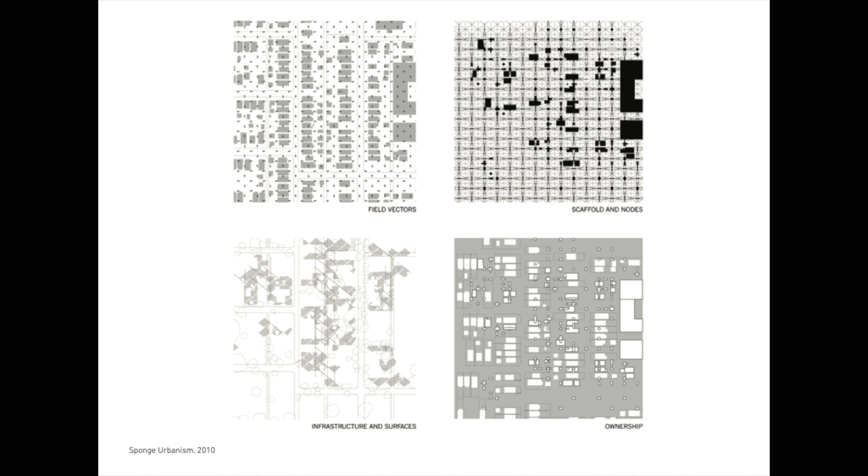So we did this by starting with a diagram, producing a series of diagrams that — I won't go into the details — but that try to switch the understanding of the space from being organized along streets and blocks to actually multi-directional fields.

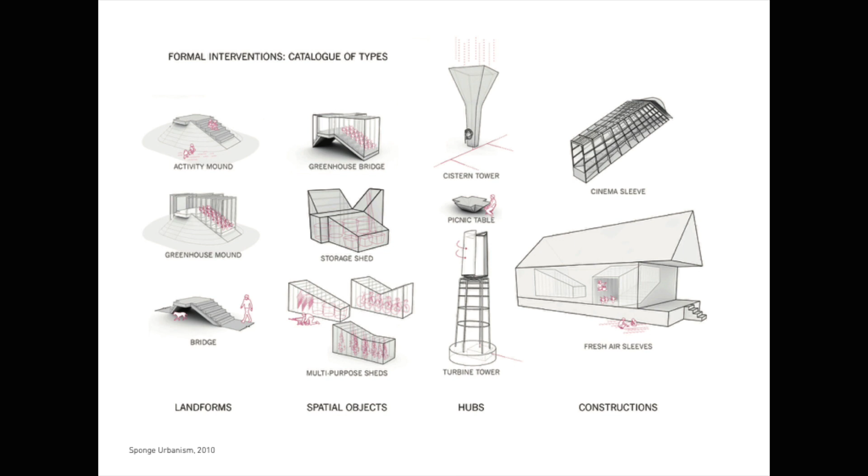If we could look at the kind of erosion of the block and of the urban fabric through the lens of this multi-directional field, we could develop a strategy where we insert really small-scale objects in what we call the minor diagram, to produce a series of infrastructures that could support the neighborhood and support the activity there.

This was developed for a publication called Architecture is All Over, published by Columbia University last year.

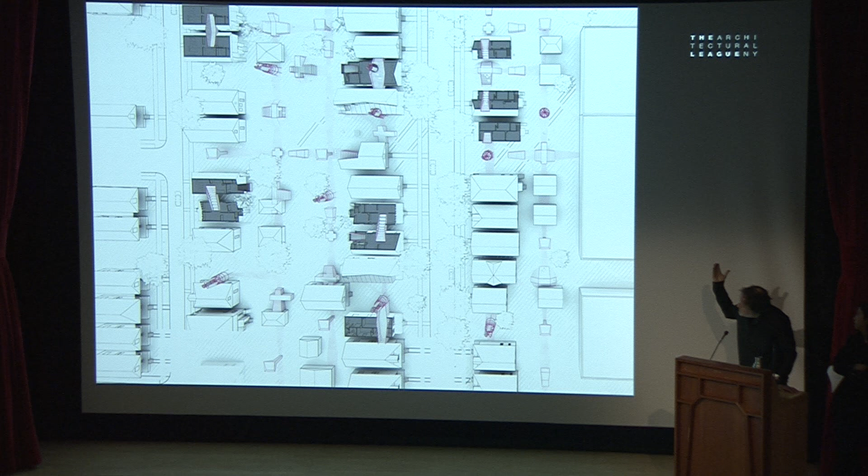In this project, you can see even the way we drew it — in this case a perspective much like the perspective from the image of the Eiffel Tower — actually cutting away the roofs and rethinking the city from the foreground and background actually collapsing. So it operates something more like what we imagined was a kind of sponge, and we called this project Sponge Urbanism.

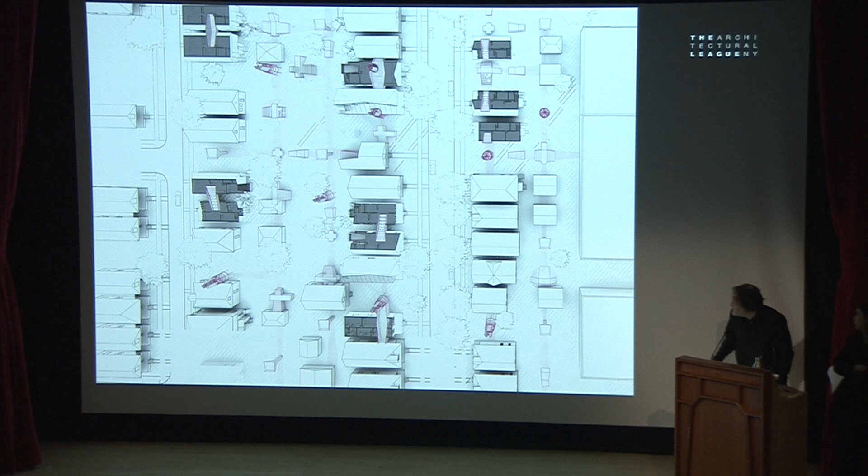This project was both an idea to demonstrate, but also we wanted to make it an idea to test a series of ideas.

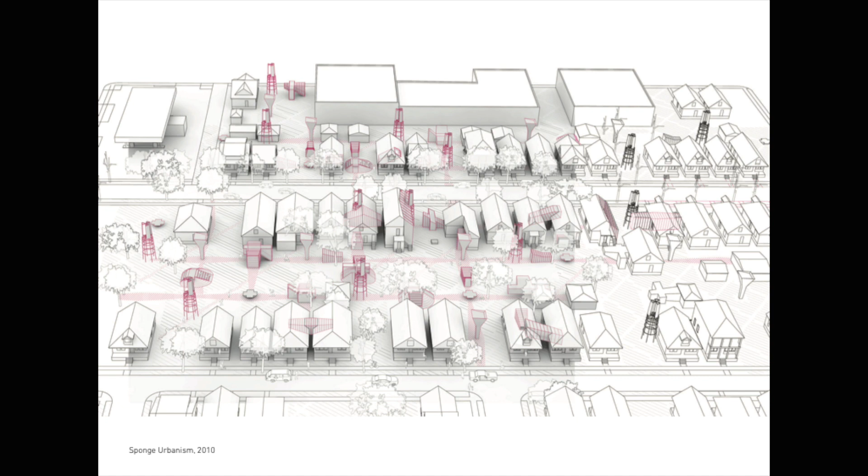We got together with a group of people at Michigan, most of whom call themselves Team now — you guys might know some of them — and we purchased this house with the group for $500.

This is the house, and the house next door actually had burned down — you can see it's fire damaged here in the image.

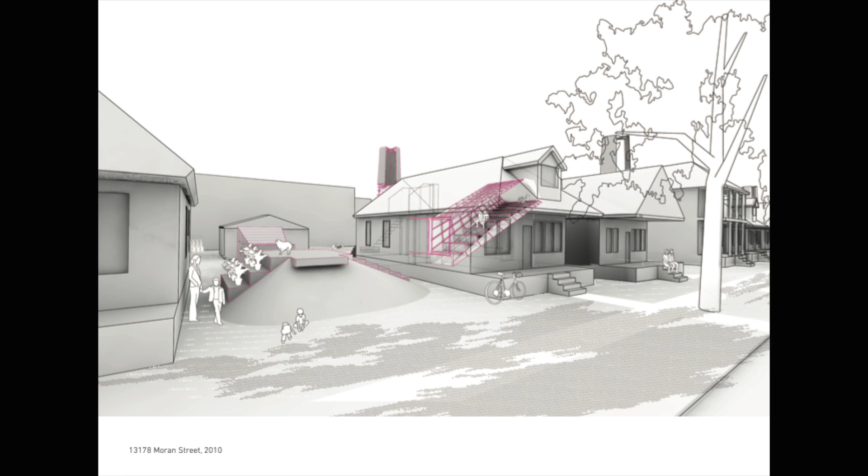Working with some local arts groups, we developed an idea. Everyone took a piece of the house, and we took this one piece in the front of the house to again look at the kind of reorientation of the house in this cross-diagonal axis. In this case, we were designing something that would be a kind of theater for projection, or maybe a theater for small readings, that could work once that fire-damaged house gets torn down — there would be this kind of park that would emerge, and also would bring light into the space.

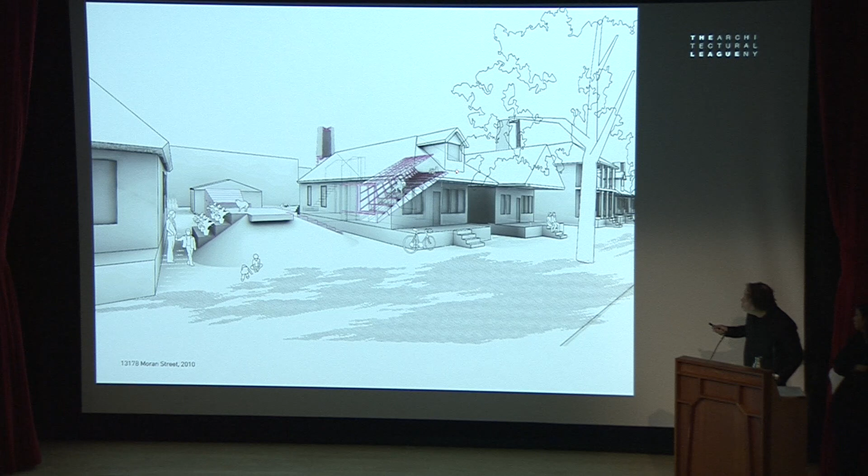So we built this up out of a series of CNC plywood panels that we fabricated and then covered with a light scrim that created both a kind of ladder or ramp to bring you up into the second floor, and also to bring light down like a lantern into the house below.

You can see there was even this moment at the roof, a giant slumped piece of plexiglass that would let you look out across the rooftops and look at the kind of reordered city beyond. Here you can see the axis up through the roof and the way it brings light and movement down through the project.

So a few months after completing this project, we were asked by David Chipperfield at the 13th International Architecture Biennale in Venice to reimagine it. In this case, though, we couldn't rely on the context, like the house, to support or react against the project, because we were working in a 15th century rope factory, the Arsenale, and we couldn't touch the walls or really any part of it.

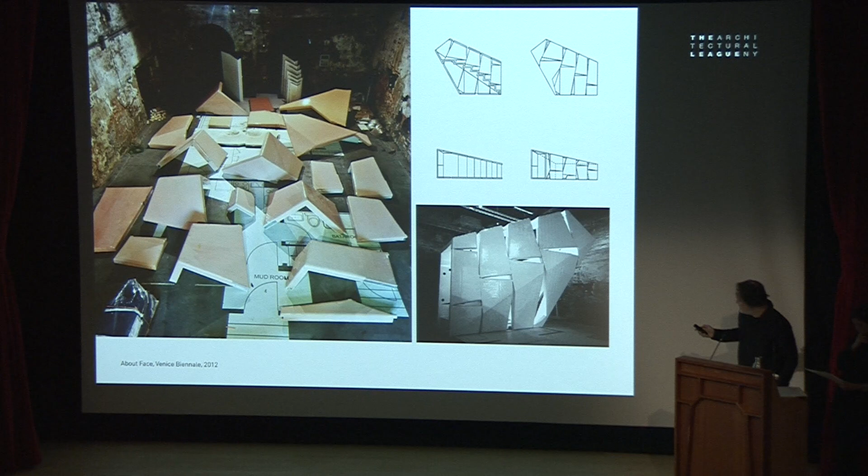So we began to look at how a series of parts or pieces could form a kind of assemblage that would construct some of its own context. These 23 fiberglass composite pieces that we produced, laid out on the floor of the Arsenale, were shipped from Michigan and assembled into the object you see on the right.

It was produced using a bioresin that was developed for surfboard production in California, for surfers who wanted to feel better about their use of carbon. And this is Rosalyne fabricating the pieces now.

It produced this kind of lantern-like form, in this case freestanding. But you were still able to move up through it and actually play in it, and even escape the relentless floor of the Biennale exhibit.

In this case, we also used a kind of salmon color that animated the project in the dark spaces of the Arsenale. Here you can see some people escaping up into the rafters, and you could actually get quite high and cantilevered quite far out into the rafters above the project.

And so this idea of thinking about parts and assemblages to construct the context, or to react to these spaces of dispersion, is something we got to explore in other projects. I'm just going to very quickly talk about this.

This is a project we did in Richmond, Virginia, with a group of graphic design, fashion design, and interior design students from VCU. We made a series of objects that they were able to rearrange into a kind of wall in an old alley, creating a kind of reterritorialization of the alley itself.

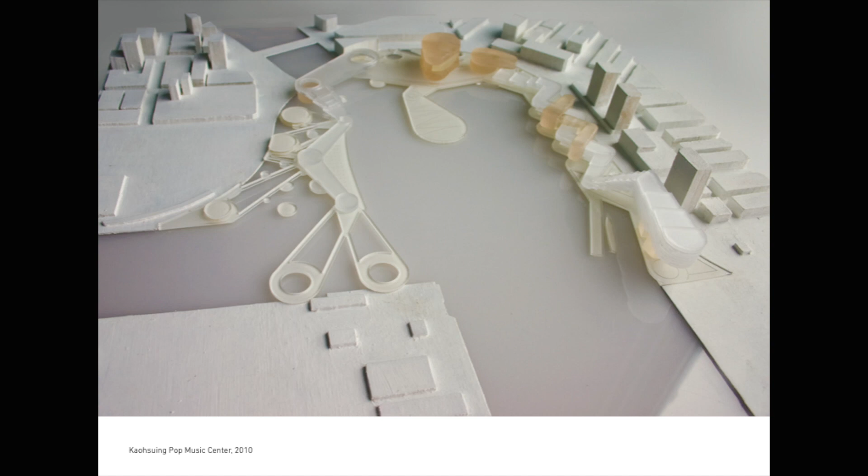This is a speculative project for our pop music center in Kaohsiung, Taiwan, that we did with Albert Pope. In this project, we were interested in the interplay between movement and form and program and landscape, thinking about the transitions and relationships conducted between them as moments of revealing, as you walk through and the circulation moves through the project.

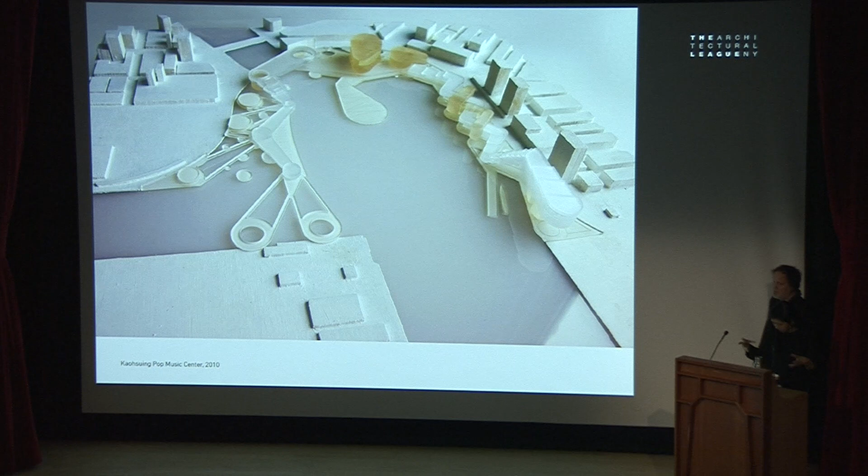It's situated at an old waterfront edge, at the end of a river, and was more landscape than building. The challenge for us was to have a strategy that could foreground openness and landscape while also directing the distribution of building form, bringing those together within a context in a manner that both filtered circulation in, as well as bringing people through in a considered way.

So we used a grid of 50-meter spheres as a way of organizing the site and bridging the building scale with the landscape scale. The spheres are a mediating representation that organize metrics and set a kind of granularity in order to align movement and make spatial relationships.

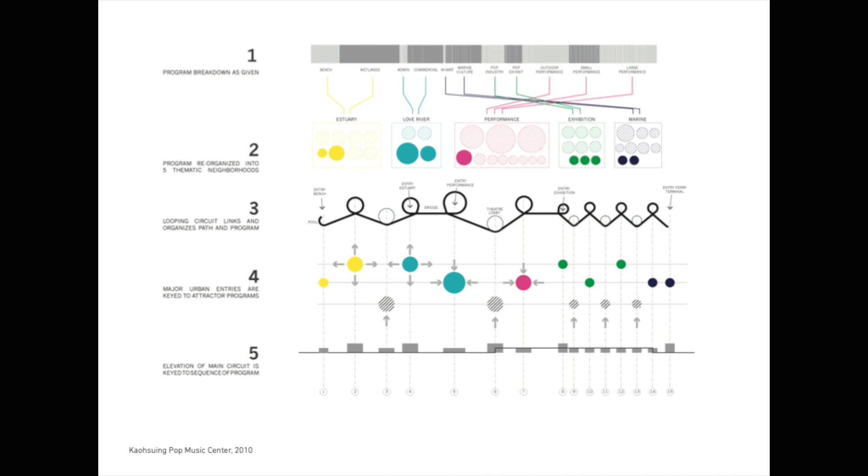So here you can see how these different parts relate. The drawings and diagrams set loose but deliberate internal relationships between the different criteria along a circulatory infrastructural path that links different districts of the city. It was also a way of thinking through program along the itinerary as it overlapped building and open space.

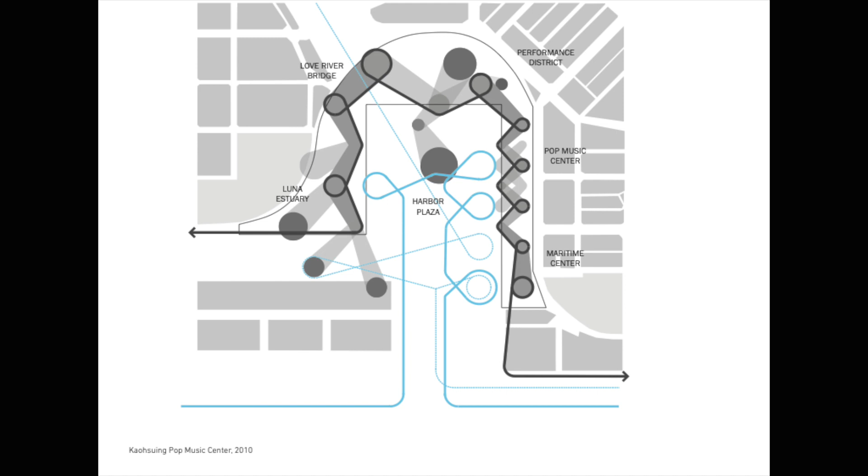Here you can see a proto-diagram plan of how it's coming together. From front to back, these different parts become visible as layers that are laminated together - the estuary, the beach, the harbor plaza, the buildings, and then the landforms, and the city beyond - a way of compressing all of those things together.

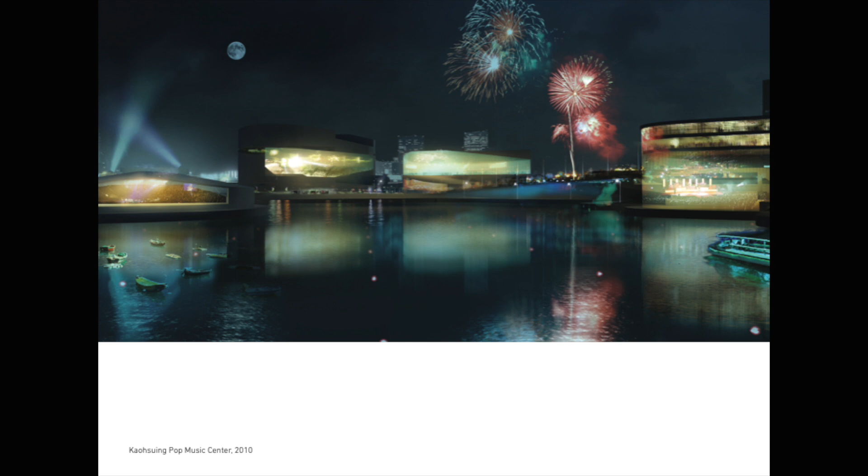And then the buildings form this tight edge around this downtown, so we're imagining a lot of activity flowing into this space.

And so for us, this was a real breakthrough in thinking about the notion of a peripatetic or moving subject that could both carve the forms of the building and also begin to structure a site.

We also explored this in a series of research projects that Rosalyne and I did in Taiwan.

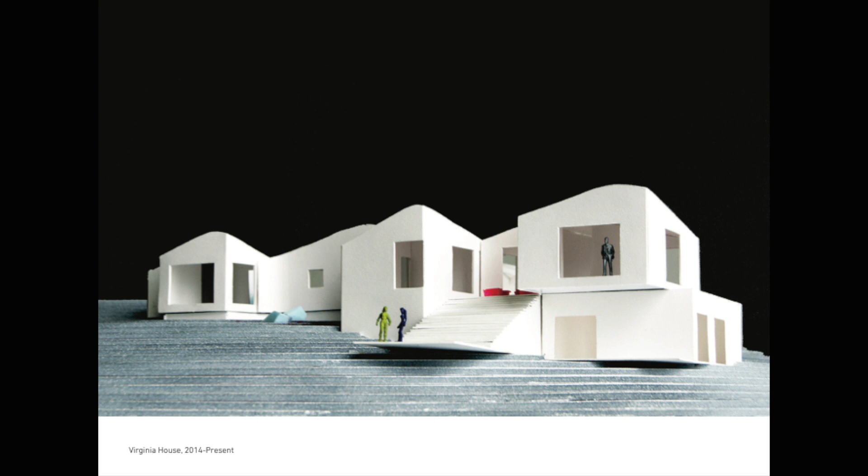This is a home for an anthropologist and a playwright in the mountains of Virginia, with the imagination that it could become a kind of playwriting retreat, a one-person MacDowell colony when the couple decides not to live there anymore.

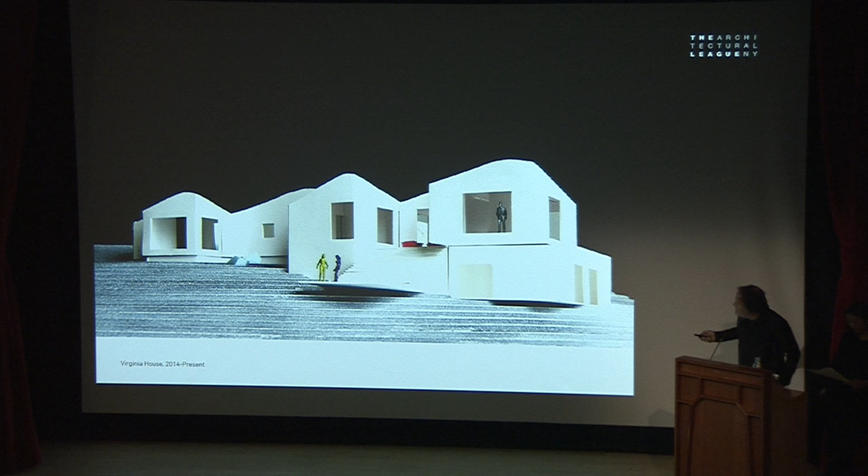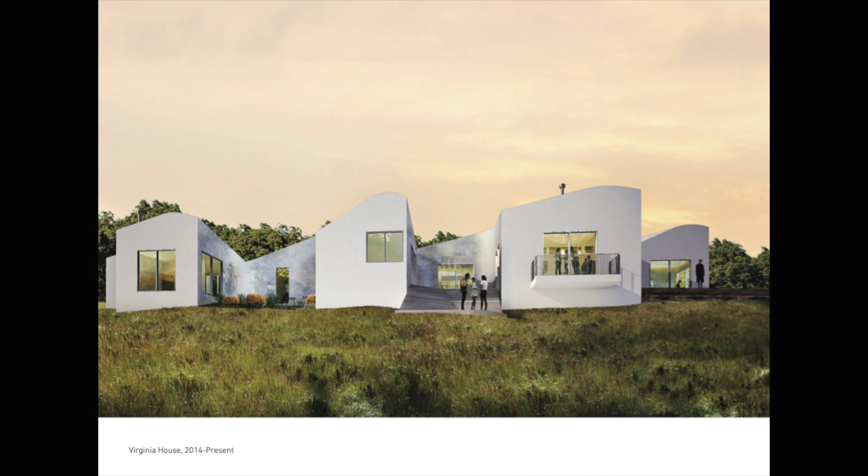In this case, we had a very steep site along the Blue Ridge Mountain, and we began to look at how a series of objects or forms strung along this line could flip-flop or move downhill or uphill back and forth against the grain, producing things that were more nested or embedded in the landscape, or more open and exposed to the view.

You can see there's this 120-foot long hallway where things like the bathrooms and the guest rooms, dining, this is another guest room, get embedded into the landscape, and the spaces that the clients really wanted to foreground, like the bedroom, the kitchen, which is very important to one of our clients especially. I guess one likes to cook and one likes to eat, so I guess it's important to both of them. And also the kind of living spaces.

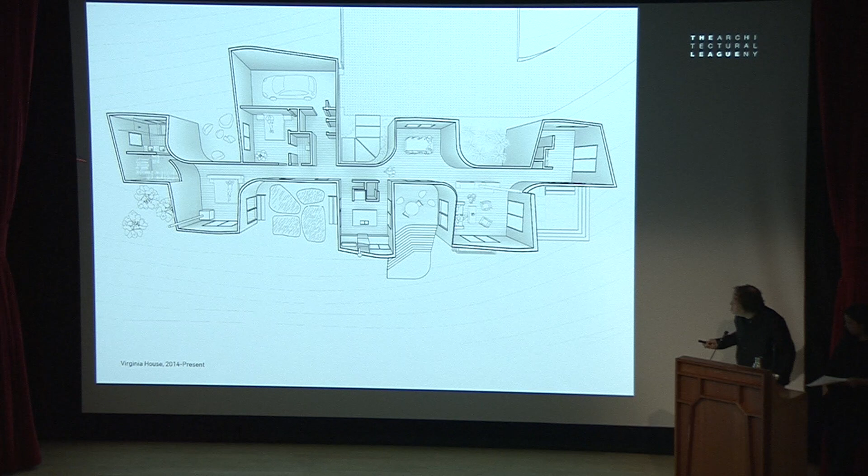It produced this kind of rhythm between the intimacy of the gardens in that landscape. So you might think the distraction of the mega view is the most important aspect of the project, but the intimacy of these gardens surrounded on three sides, and the buildings surrounded on three sides by these garden landscape spaces, string along through the project.

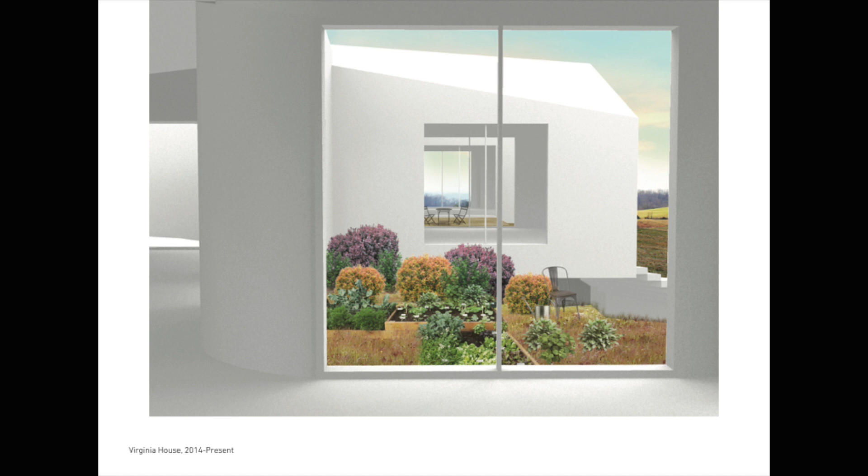Here you can see the string of these spaces that would look out towards the view along this telescoping path that you move through. This is the moment where you look across the gardens and the outdoor spaces, from room to garden to room to garden to room to garden as you look along the project. And of course, you could look out to these sweeping views of the Blue Ridge Mountains.

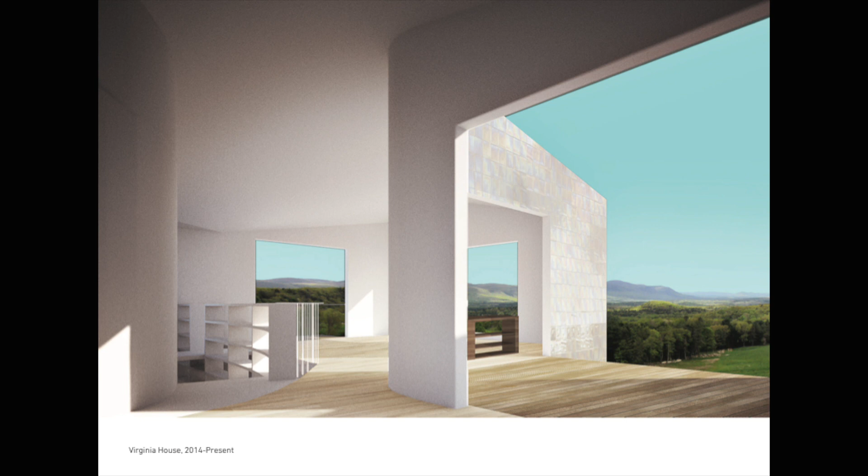I guess we still are naive, less young. But we made some sketches for them for almost no money and thought they would go away and never talk to us again. But they showed up 6 months later and they had the land secured and they had the funds to start the project.

This became essentially a 5-acre music venue in Houston. You can see its proximity to downtown. It's one of the only ground-up music venues of its kind that I've ever heard of, because most rock and roll venues, if you're in a place like New York, you have the great old metropolitan fabric of the 19th century that you somehow inhabit in old warehouses and breweries or whatever. In Houston, you have to still build these things. So how do you build something that's going to have authenticity, that's not an old pier or old warehouse, is something that became very important to us.

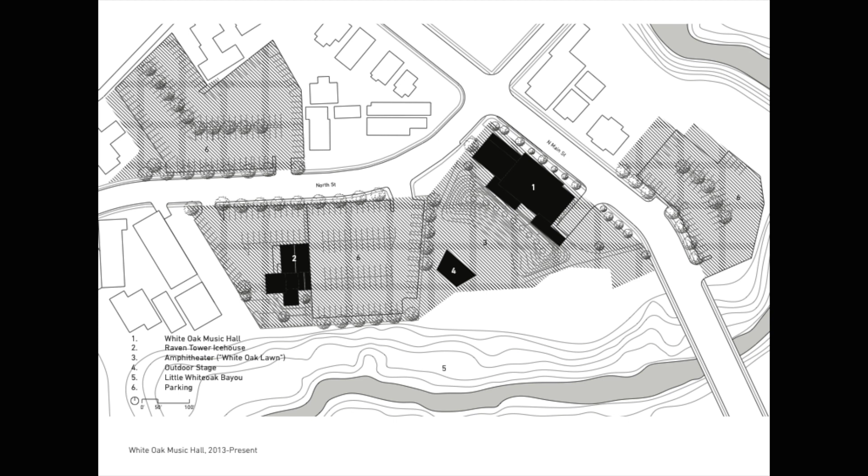For us, the engagement with the landscape, this is along the bayou, as you can see here, which is a river. I don't know why they call them bayous in Houston, but they do. They're really rivers, and the bayou has a lot of mosquito-ridden connotations. But anyway, there's a river here, which Houston is in the process, like a lot of cities, of returning to its riverfronts and thinking about the ecology.

And it was situated within the views of downtown. This is a place where we had to investigate what it is to construct an urbanism from almost ground up in Houston, with a few remnants of what was there, but inserting new things almost surgically.

So there's a kind of main venue, we call it, that has 2 stages. There's an outdoor amphitheater for about 4,500 people. There's an existing building, that Rosalyne's going to talk a little bit about, that was built as a conversation piece in the 1970s that kind of stayed, that has 2 stages in it.

And all of these things had to seam together in a way that we could actually think about this question of what we call seamfulness, that comes from Mark Weiser's discussions of ubiquitous computing, but how you can think of things that could exist semi-autonomously and make the seams between them something you actually celebrate and experience, but in a way that's not necessarily a hindrance.

And so we began to reflect on this idea of seamfulness and stitch these things together.

Yeah, so I think what characterizes White Oak is that a lot of this is like kind of post, after the project, thinking about it and thinking about what has happened and what the effects are. And sometimes we think about these things and there are things that we realize after the fact.

But there's lots of kind of unlike pieces, and we dealt with them one by one, incrementally, as we had to.

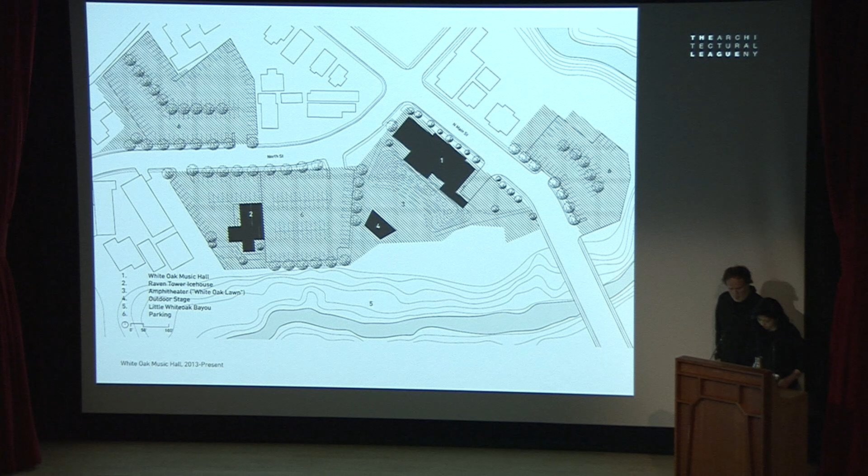So the largest piece, as Troy mentioned, is this new building that houses 2 indoor music venues, right here in this perspective. And you can see that there's an outdoor stage that is also a kind of another piece that is part of the set of pieces.

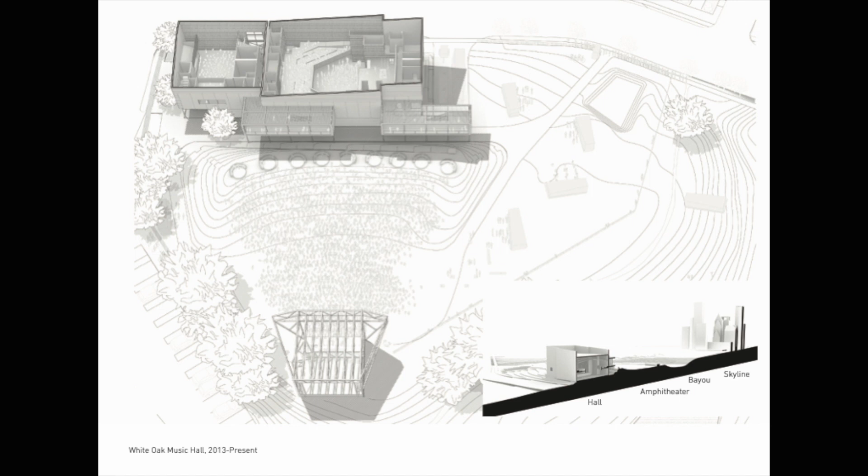And one of the major moves that we were undertaking, or trying to do, is to structure a relationship between the bayou. So if you look at this little section here, between the bayou, the new main building, and then the downtown views, and that kind of compression, to perceptually structure the spaces such that you would have a kind of intimate crowd experience, but at the scale of the entire city.

And so kind of reaching out and grabbing the skyline, as a way to feel both small and big. So the venue has 5 stages, and you can see 3 of them here.

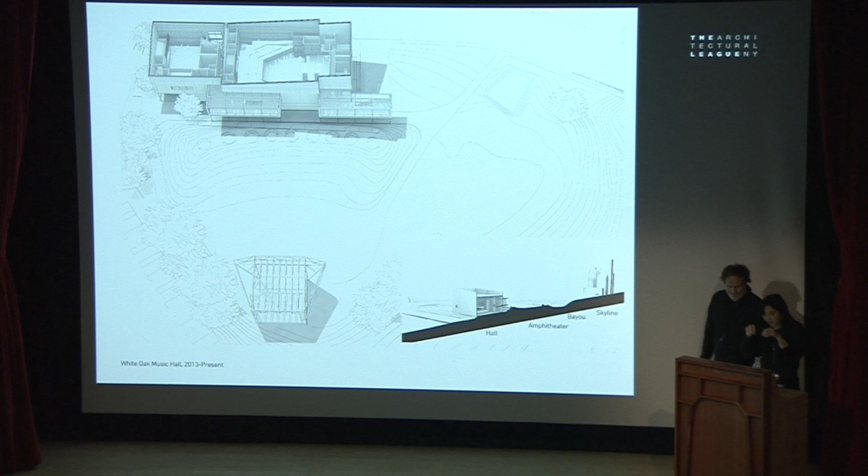The main indoor venue, which is the big one, the small indoor venue, and then you can see the terraces, and then the outdoor venue, and then you can see the terraces that create a relationship to the exterior. So it's kind of like this nested relationship, I think.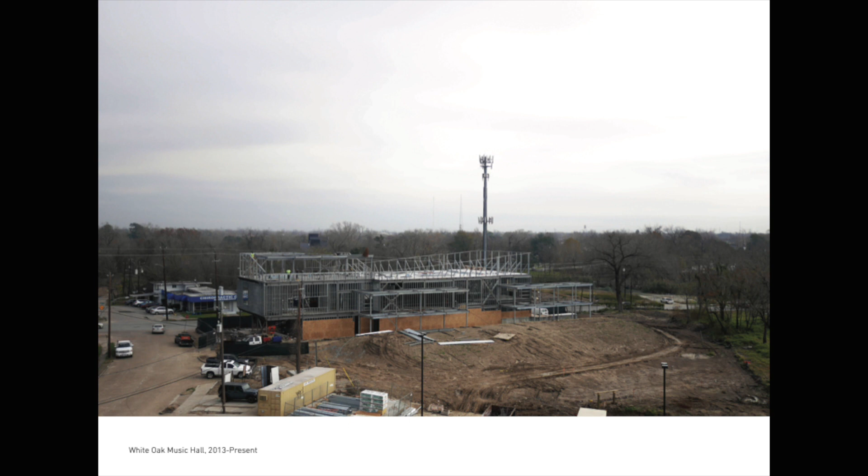So the project actually involved a very extensive reconstruction of the site. We rebuilt sidewalks and sewer lines. We closed a street that led to nowhere. That sounds interesting, huh? And we substantially regraded the site to support the amphitheater program, as well as to accommodate a new detention basin under the outdoor deck of the Raven Tower Ice House, which I'll show you in a second.

The process of construction also uncovered an old low water bridge that used to cross the bayou, and which we found remnants of.

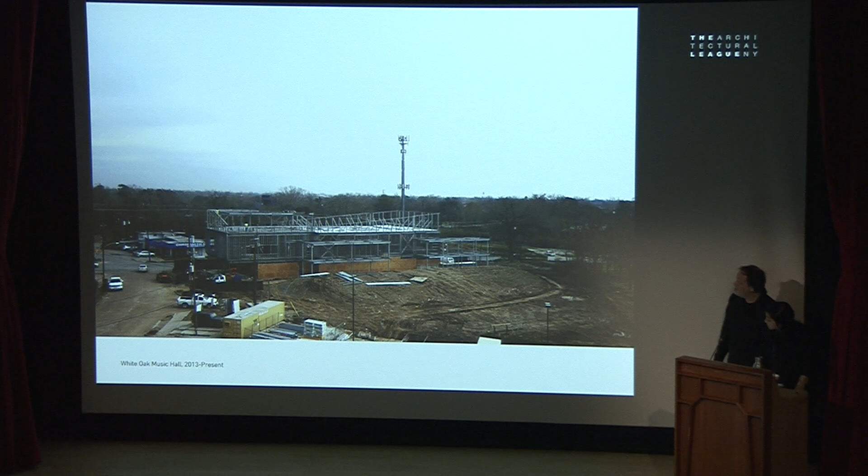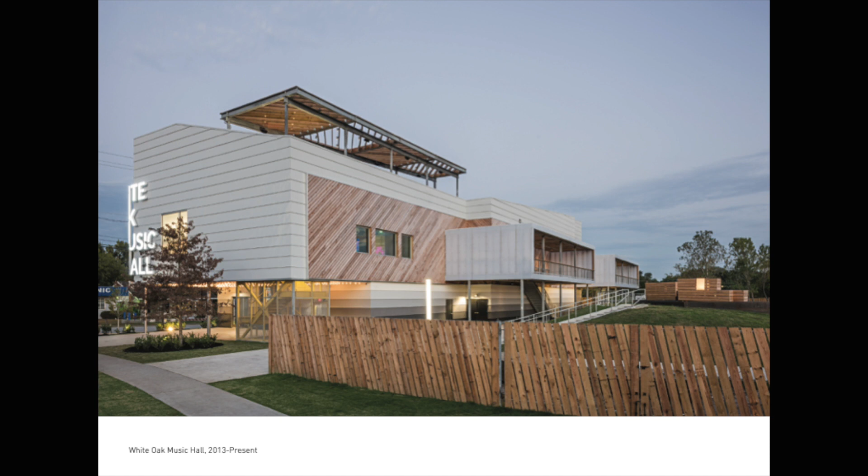So here you can see the main venue finished, the rise of the amphitheater, some of the lawn furniture in the front there, and then the main entrance, which is right under the sign.

So we thought of the building as supporting an audience and being defined as much by its internal venues as being on the outside, a series of places for people to gather and watch the outdoor show.

So from these, you can see the hanging polycarbonate balconies, the covered roof deck. These are all places for people to stand and look out towards the main stage, and then the outdoor furniture are also places for them to gather.

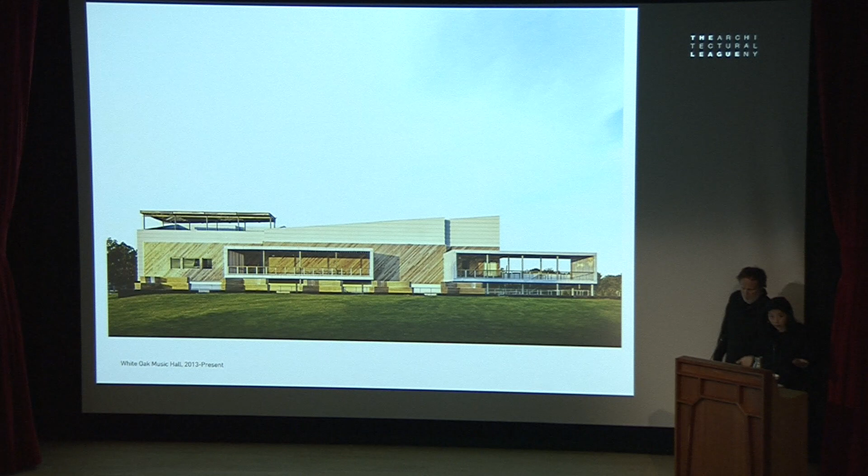And then sandwiched between that lawn and the building is a circulation path that threads alongside it and through the site, as well as allowing you access up and down from the balconies.

I just want to jump in because this is the real rock and roll moment, because we were working with the production crew and the roadies and all the people that actually put on these shows, and we learned a lot about how that actually works. We would argue with them a lot because they're not actually very concerned with aesthetics at all. If you think of most of the clubs you go to see good music, they don't look like this. So after going toe-to-toe with these guys, very tough guys, mostly men, for a long time...

They called us the day of the show. They did the first sound check, and the guy was like, I almost cried because I don't know what you guys did with these guys from Connecticut, but it's like one of the best sounding rooms that I've set up. So anyway, we had some successes that way.

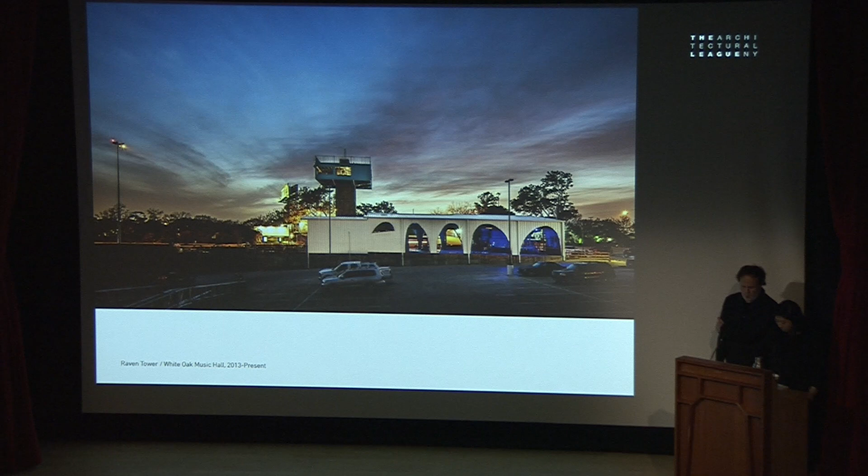But as a way of moving quickly and also to save on MEP costs, we turned it into an outdoor venue by just cutting holes in it. I mean, it was a little more complicated than that, but we cut some holes in it.

For us, in thinking about these unlike parts of the project, it's like a combination between found objects and new constructions. The way we try to think about them as all fitting into a single category is this: we totally dissolve the divide between new construction and natural landscape, and think about the whole city as a kind of geology that includes natural formations, where buildings are also kind of natural formations. So just a few images we really like of the project.

This one we didn't take, it was taken by a journalist, but the forms dissolve into the night, into the looseness of the surroundings, and also the looseness of the surrounding context of Houston, and a kind of inversion of space and building as evidenced in this photo.

And then the way it presses up against the street edge and mingles with the electrical cables is particularly a favorite image of ours.

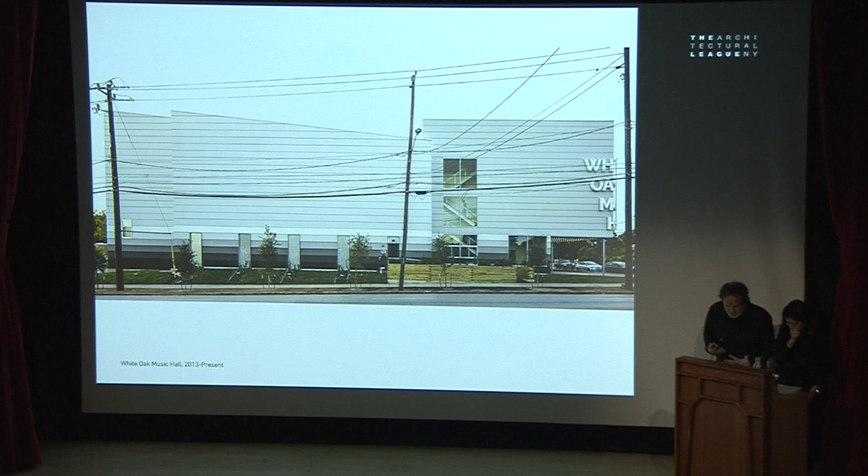This is a building made out of Hardie board that's been ripped into 2 foot by 8 foot pieces, with an overlap of 1 foot 10 inches. Hardie board is what most of Houston is made out of, so there's a kind of cheap and cheerful way, as Paul mentioned in the introduction, in which a lot of this work has to happen in that context, and these bold geologic forms are one way we bridge that divide.

And then just the last image I'll show of White Oak, which we enjoy because it drops back like a landform behind the activity, which itself becomes a kind of spectacle in front of it.

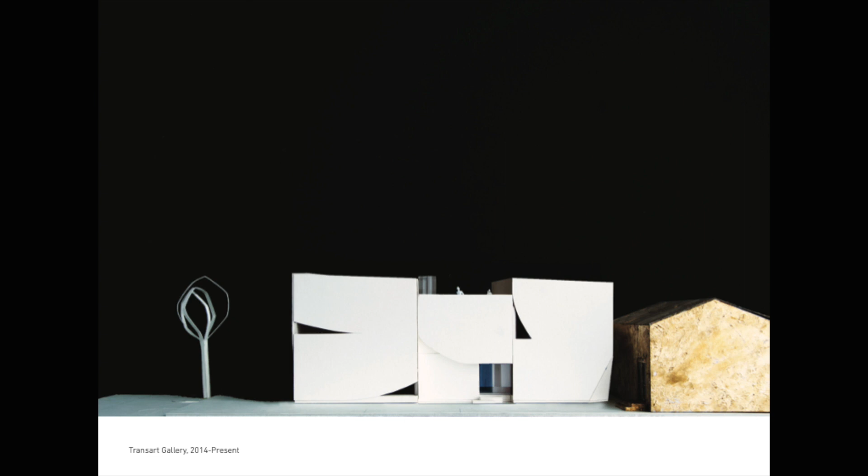Okay, so this is the last project we're going to talk about, and it's gotten published a lot, so maybe you guys have seen it, but I don't know why. But anyway.

So we actually officed in this space. This is a purpose-built photography studio that had 16-foot ceilings, and we were officing in this space.

Our landlord is a really interesting woman named Surpik Angelini, who was interested in the intersection between anthropology and art. She's been interested for a long time in supporting and curating art projects that look at ethnographic practice and reflect on art that reflects on its own making. So she came to us with the idea of: can I make an institution for that? Or a space that can house that institution, somewhere between an institution and something else.

She grew up in Venezuela at a moment in its history when there were these residential salons that would support art and conversation around art. So this is somewhere between a kind of house and a kind of gallery, in that it's not a commercial gallery.

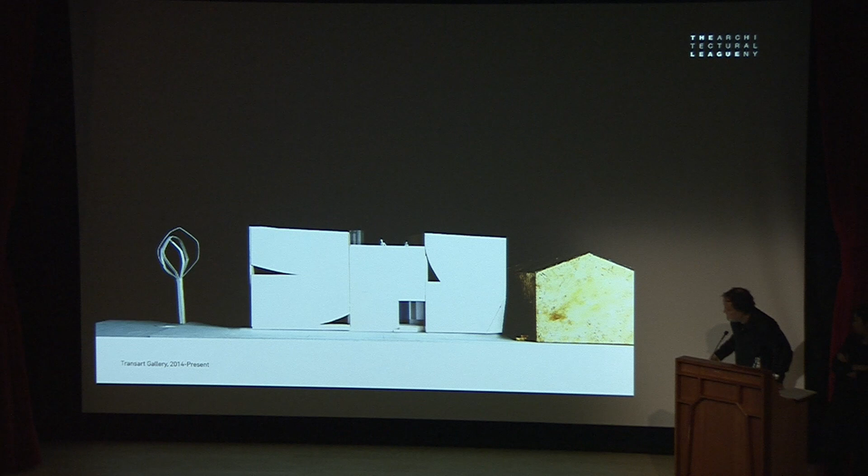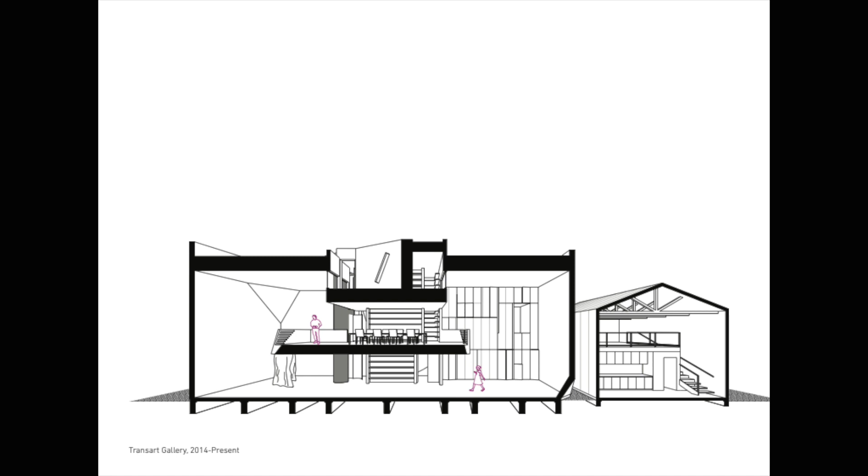The gallery itself, to the extent that it's a gallery, is broken up into two spaces. There's a space in the back with a kind of service wall to support things like performance art or new media, and a space in the front. They're almost perfect cubes, but not quite, and this one is more light-filled and closer to the public, more like what you might imagine a traditional art gallery.

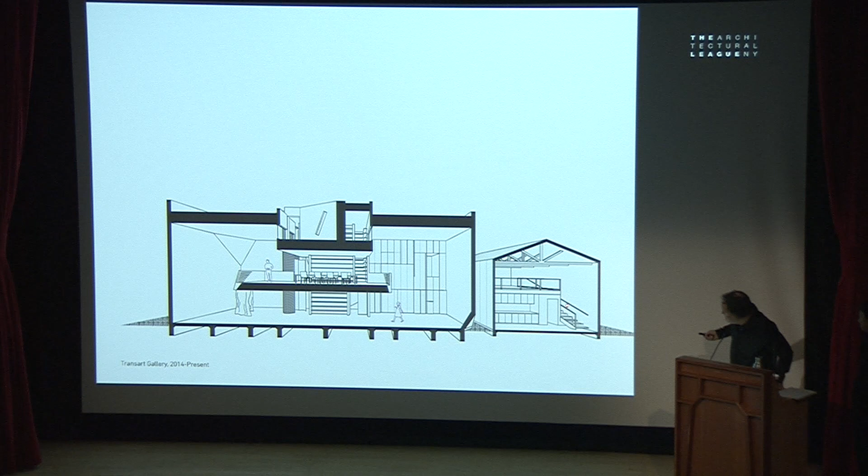There's a kind of spine or core in the center that supports a lot of the activity she imagined in this space, including room for 10,000 volumes of books on art and anthropology that she wanted to move in, a space to meet with anthropologists or artists, and a place for her to write and have meetings. This is the space in the back that used to be our office, we have an equally cool office now, and that space now supports local artists preparing shows.

And so the project exists right at the edge of the Menil campus, very close to the Rothko Chapel, surrounded by these kind of iconic, very strong monumental projects in the city.

But those projects also operate at a kind of domestic scale as well, which is really interesting about how these important institutions in Houston deal with that problem. We were caught between how do we think about this city space we're working in, and how do we think about the problem of monumentality in an institution like this in a way to break that down. We came back to this idea of panels—we originally imagined these would be machined GFRC panels, but we couldn't quite afford that in the end. So we used a system of panelization that would produce relationships across the facade and construct its own kind of context in this space.

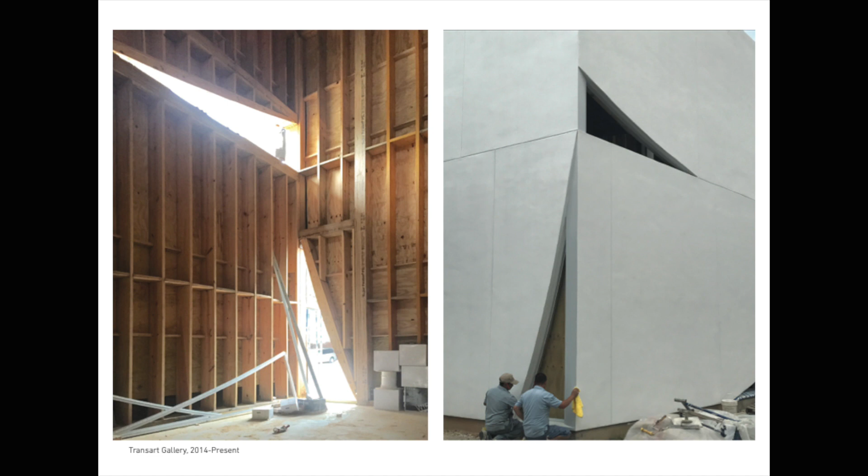This is a gravel lot that's adjacent, that I'll show you in a minute.

This is the building as completed—you can see the volume in front, which is the traditional gallery, and the volume in back, with the entry and roof deck. The building was originally imagined as a steel building, but we couldn't find anybody who would bid a reasonable price for such a small steel building. So in a piece of serendipity, we re-engineered it all out of heavy timber—it's all LVLs. Some of these cuts are quite structurally complex, but it was built like a barn, with lots of manual labor lifting these beams into place.

The other thing—I mentioned the CNC idea for the panels—we thought at least these windows would have to be constructed using the tools we all know today. But in the context of where we work in Houston, what the fabricators actually did was take the beam dimensions from our construction drawings, trace them onto the wall, and build the frames to that shape.

These are basically artisans, but they're the sheet metal guys, and they fabricated some of the details you might have seen on site. The nice thing about the wood construction is it let us carve some of the detailing into the structure so that we could accommodate it with the sheet metal.

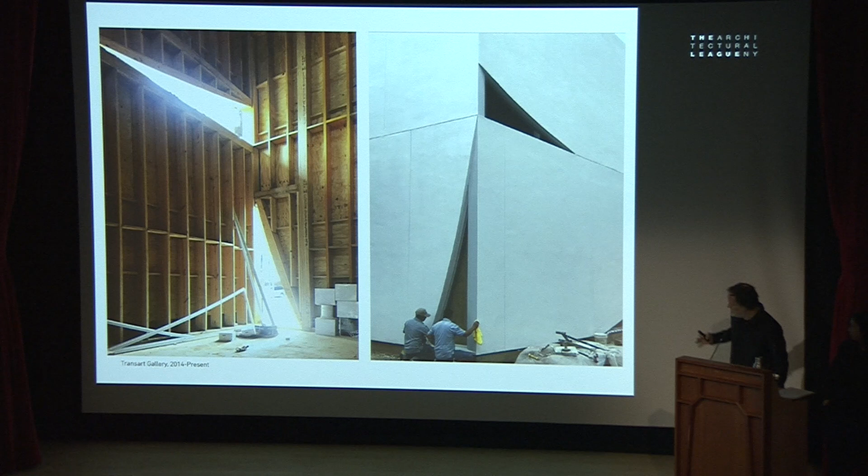And so you get this—this is the facade to West Alabama, which is the main street. It's both, in a way, a strong form set of panels, but it actually has this kind of softness and peels back.

So there are a lot of idiosyncratic moments. Paul mentioned this idea of surprise, and we certainly have a lot of little surprising moments in this project. This is something we call the nook, or the ovum, in the project. It's an idea we concocted with Surpik—that maybe there could be a space you could retreat to off the main seminar space and have a meeting with just one or two people. It's made with handmade plaster, and we actually collaborated with a local artist who builds sculptures that look like ships.

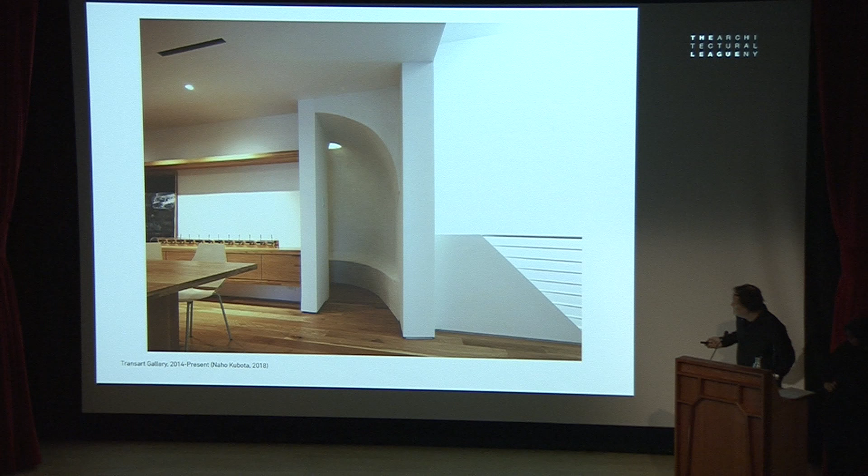We CNC'd the framework, but then the local artisan actually constructed the plaster form around it, and it's like a little cocoon that you can go into and have a meeting or read a book in. This is the gallery that supports the media, with a space for a kitchen so they can support receptions, and a little balcony.

They had a performance art piece on the day the project opened that portrayed the project under construction. A performance artist played the architect, Surpik played herself, and a series of actors played the workers, who were then auctioned off. It was kind of a surreal experience. I watched it from the top floor looking down, like some sort of ghost watching your own recent terror.

Those of you who have finished a building on a punch list or a tight schedule know what you're rewatching. But the artist had kind of lived on the site during that experience and was remaking it in a very dramatic way.

My point is, these balconies became places for spotlights and sound, in ways that can support this kind of performance art.

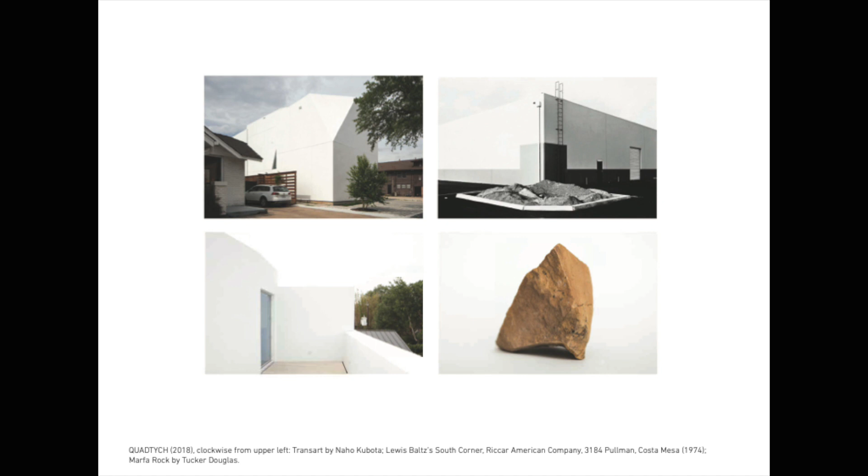Another tool we use to explore these things is a kind of quadtych, where we take found objects or photographs by photographers we admire, like Lewis Baltz, and juxtapose them with our work to look for associations that can help us see our work anew.

This idea of blankness is something that's kind of terrifying when you start a project, or rather when you start a practice. The idea of blankness is a kind of shared terror that maybe many of you are familiar with.

But then there's a moment where it's hard to recover that notion of blankness, and you kind of wish you had it back. So we're always looking for ways to see things anew.

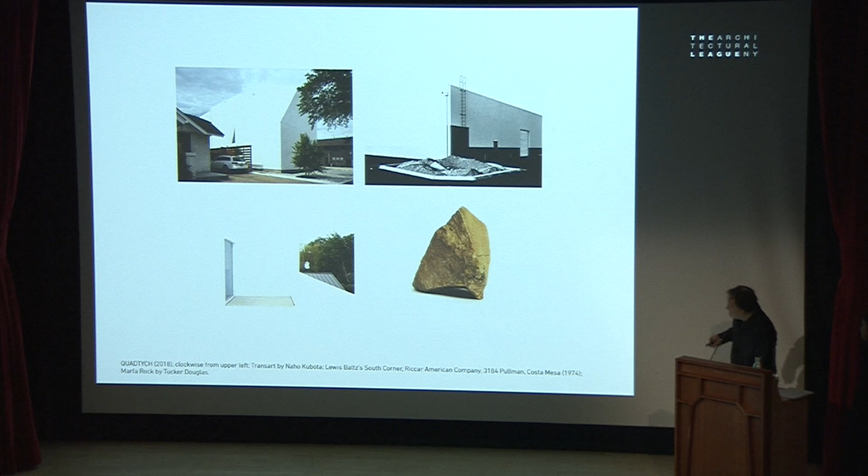Here you can see the actual context—this is a building where they used to make maps across the street, and how we try to work with these taut or blank forms to construct our own kind of context.

For us, I think the idea of being able to talk to you today about what's emerging in our practice—or the idea that we're emerging or emerged, I don't know exactly what the word means—but through the idea of blankness, as Rosalyn mentioned in the introduction, the idea of the blank page is something we've thought a lot about: how we construct that, and turning it from the blank page into an idea of blankness that is recoverable and emergent in the work, maybe redeployed from some universal notion into these specific moments, has become important to us in our conversation.

This has been a really amazing and important opportunity for us to reflect on that in the recent trajectory of our work. So thank you—it's been an honor.